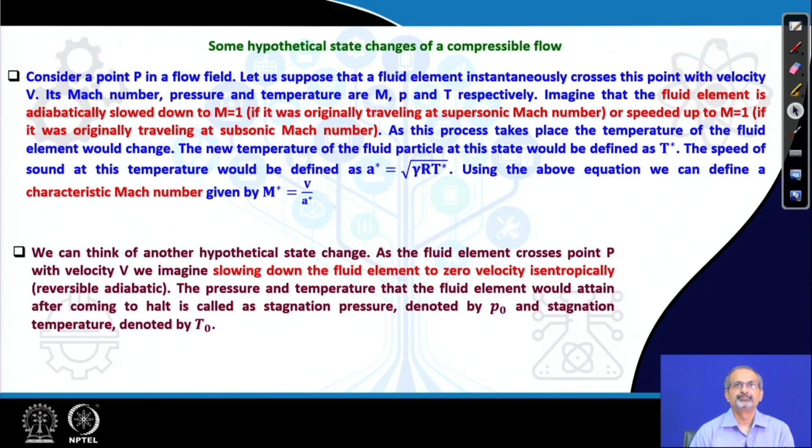And then we will remove the subscripts for station 1 and imagine that the gas reaches a stagnation condition at station 2. So, we are talking about slowing down the fluid particle from a state of motion to 0 velocity, and we will bring in the concept of isentropic slowdown in due course, but not immediately. When it slows down to 0 velocity, we have the concept of stagnation temperature. The dynamic part gets absorbed into the static part, and therefore the static part gets elevated to the stagnation condition.

Now, a very important point here: when we are defining stagnation temperature T naught, the flow needs to be adiabatically slowed down. It does not necessarily need to be slowed down isentropically, because the energy equation is based on an adiabatic assumption, nothing more. We are not saying that it has to be necessarily reversibly adiabatic. Therefore, just adiabatic condition is sufficient in order to bring in the concept of T naught.

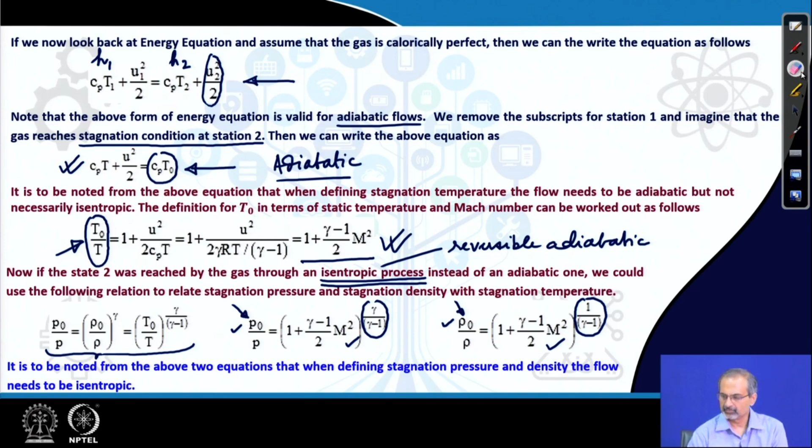So, it is only those 5 equations which have to be solved ultimately, but additionally if you bring in the concept of A star, M star in between, the derivations become simpler, and that is why we have already introduced these terms. So, you can try deriving these equations on your own later on as a homework problem, or try to refer to some of the references which I have already stated in earlier lectures, in order to go through the detailed derivations of these equations, which we are stating directly without proof.